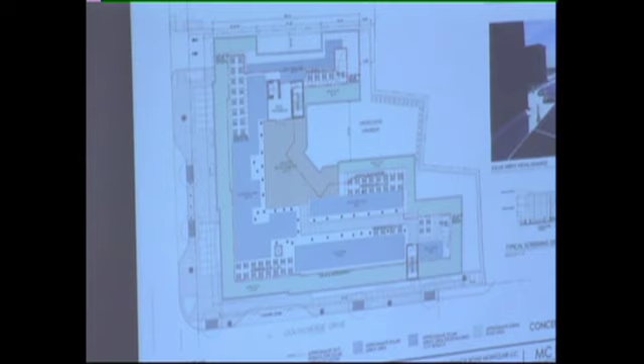So now we've come to 25% of the roof, which we feel is the maximum we could install as low on the roof as possible. So now, how do we go about determining the numbers for the solar power? 4,417 square feet is our working number.

We work with a solar consultant who recommends using about 30 to 35 square feet per panel. The reason for that range is you can't put the panels too close together, or one panel could shade the next. You can see in the photograph the panels are always slightly spaced. We also need room for serviceability, and there's the configuration of how things work out.

So we take the roof and divide that area, giving us an estimate of 145 solar panels on this roof. That's about 30 square feet per panel, on the more aggressive side of that range. The panel we're proposing is a 325 watt maximum power generation panel.

So now we've got the math to run the formula to determine what these solar panels will generate. Using the National Renewable Energy Laboratory website, which is run by the government, you input your solar panel and your zip code, and it runs a formula determining the number of sunny days versus days of rain and clouds, telling you how much energy you can generate from those panels.

At the end of the day, using those formulas, we get 49,665 kilowatt hours. I know we're not here for math, but this leads into the fact that we still only have 25% of the roof as solar. So to make up that deficit, we're proposing to purchase renewable energy credits, not for the entire 50%, but just the equal amount to what we can produce on site.

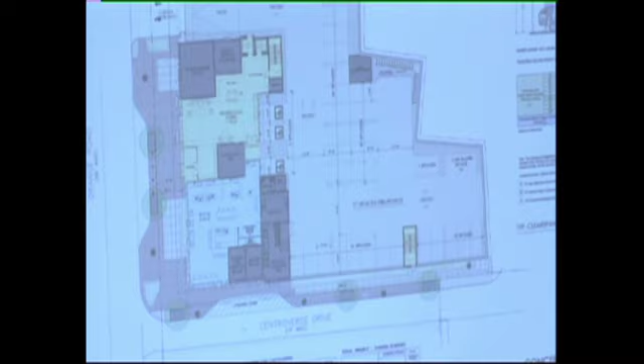And again, there would only be one move-in occurring at any given time, typically on Saturdays, and it's a scheduled service with building management. Mr. Johnson, my understanding is that assuming maybe a turnover of 30% or less a year, we'd be talking about maybe 12 moves a year. Is that your understanding? Yeah, for a building of this size, that's correct. For 46 residential apartment units and a turnover of approximately 30%, maybe there are 12 move-ins occurring in one given year.

It's a nice plan, but what's going to stop people from pulling in that curb cut out on Orange Road? That happens to be a whole lot closer to that door.

Again, building management is going to control that operation, right? How are they going to control it? So move-ins are a scheduled service. You have to apply through the leasing and management office to move into the building, to gain access to the building, to unlock the elevator and provide access. Building management has eyes, there are security cameras on the building. If a resident tries to move into the building on an unscheduled or uncoordinated day, I think they would be shut down.

So building management is going to go out, check the location of the van, the moving truck, make sure it's in the proper spot. That's what you're saying? I think the more important part of that is the access control on the back door of the elevator.

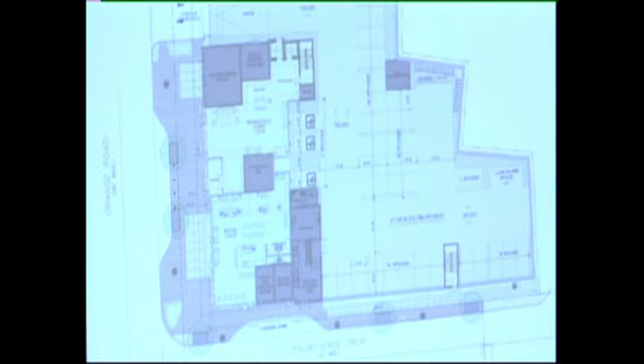And contractors or landscapers, would they use that loading zone? They would utilize the loading zone. And the building management would control that, right? So if someone was coming to service the live roof, they would use the loading zone or park internally in the garage.

Is there a concierge desk in the front? There's not a concierge desk here. There would be off-site management located in town or the surrounding area, but the building would be monitored 24/7. But I think what I'm alluding to is the concerns my colleagues have expressed about truck usage blocking the streets, without a doorman or door person.

Yeah, I'm saying another witness. But Mr. Johnson, will there be a valet there at all times? There will be a valet attendant internal to the parking garage, yes. Is that 24 hours, valet? That testimony will be provided later. We'll get to that a little further - we'll defer on that answer, as it's not correct in terms of the valet.

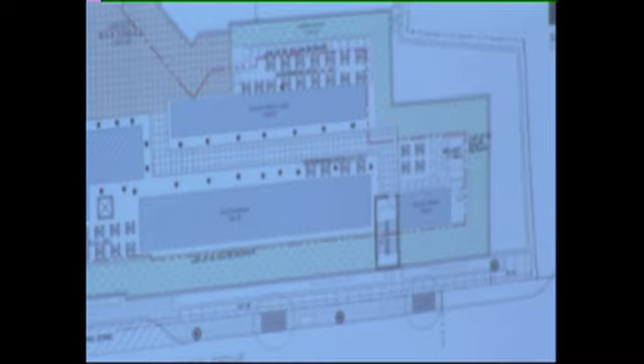I just have a question about the amenity court on the right there, the lower amenity place. Is that some kind of greenery that goes around the edge? It is - that's illustrative, but it's intended to be a raised planter at the edge of the parapet to soften the edge of the raised pedestal courtyard area relative to the adjacent parapet. It also keeps residents back from that edge and acts as a buffer.

How far is that from the next building, the edge of that? There's not much space between that and Valley and Bloom behind it. The line here that zigzags and is partially dashed represents the property line, the lot line - it's an atypical line there. Our ground floor level more or less follows that property line. We have a party wall condition offset from the property line by approximately 18 inches to provide for construction tolerance, but it's a typical downtown infill condition where the ground floor is built up to the adjacent wall of the adjacent structure, which doesn't have any windows either and is also a party wall condition.

And then at the upper levels of the residential, as I previously testified, the residential building where we have windows and apartment units for residents steps back from that property line to provide light and air.

Where is the typical screening detail at the roof, and where will that be installed? We have a typical screening detail located here, but that detail would be installed accordingly.

Right now we are schematically showing two RTU units, rooftop units used to heat and cool the common corridors, residential amenity, and residential lobby for the building. Those are larger units approximately 96 inches in height. They typically sit on top of a curb that's 18 to 24 inches high, and the actual unit can be 5 to 6 feet in height. So we would use that screening detail around that unit.

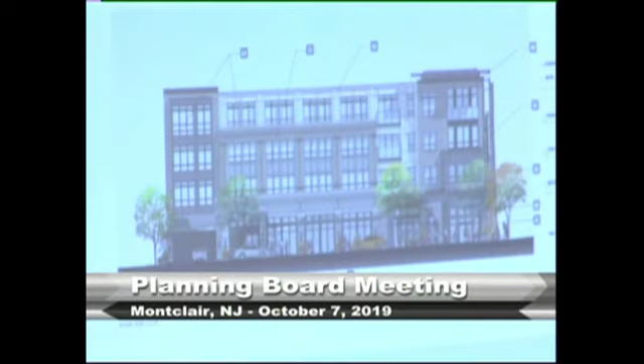That's not my reading when I look at that drawing. The roof datum line represents the top of structure at the roof, and then we're showing that the revised parapet at the corner of the building is approximately 48 inches in height. And the 3 feet below that—am I wrong? Okay.

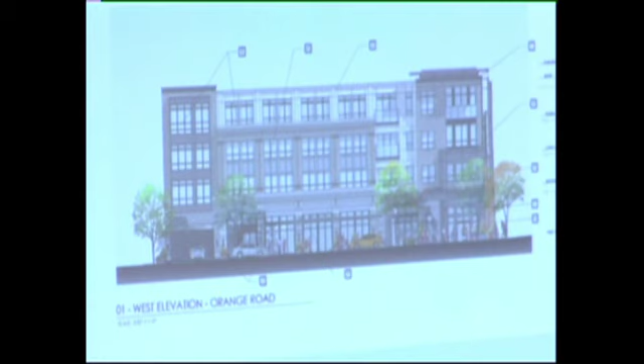I believe you. And did the building height change from 52 to 51? So the building height label was revised from 52 to 51. So 51 is the correct height that matches what's on the civil engineering drawing. And again, building height is being measured from the mean natural elevation around the building to the height of the roof deck. We're permitted 55 feet in this zone per the redevelopment plan.

Is there an image of the building in context to the surrounding buildings? There's not a revised exhibit that shows it in context. We have the previous exhibit that we proposed, that we presented at the September 9th hearing, that I could share with you. At some point, can you represent that again?

Revision. Sure, would the board like to see that now, or are you suggesting that we resubmit that as a revision? Resubmit it as a revision. Yeah, we'll resubmit it as a revision. Okay.

Just so you don't overlook it, we were talking about the rooftop - you didn't know what the height of certain things from the roof have to be. So I provided testimony that the rooftop equipment will be approximately 96 inches in height for the RTU units.

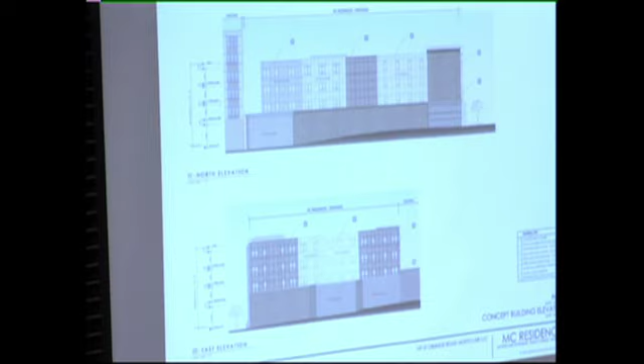Again, for the rear-facing elevations, building materials being proposed are vertical fiber cement siding panels with reveal trim at the upper residential floors, masonry brick veneer, and manufactured cast stone at the lower levels. Along the Orange Road facade—hold on, so you've decided to stay with the fiber cement panels?

If I can get there in my testimony—we heard comments from the board and took an opportunity to reflect upon the proposed exterior building materials. We had some concern; there was a recommendation to use stucco in place of fiber cement, and we had some concern with providing that.

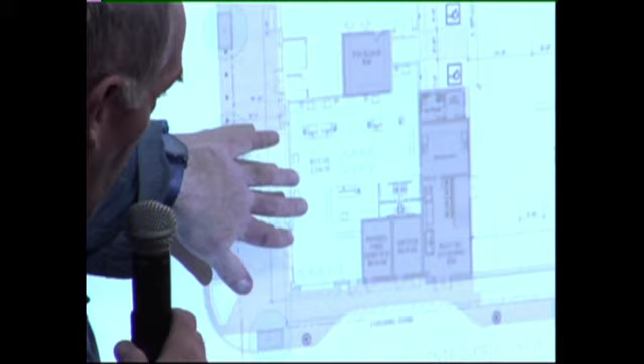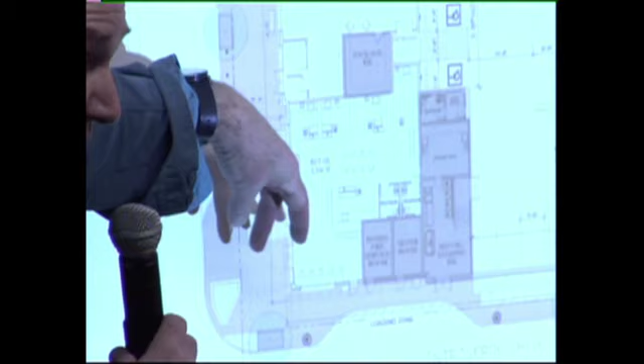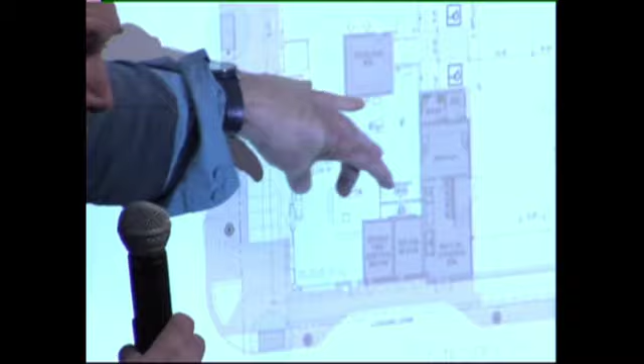So this material here, let me just call it cement—you have a patio within a plaza. This, I understand from testimony, is to be the outdoor seating, cafe eating area, tables and chairs. According to the sidewalk cafe license, because this distance between the facade of the building and the property line is more than 15 feet, this dining area has to be moved out so you can have a 6-foot passageway between the facade of the building and where people are eating. Where it's less than 15 feet, you can do the passageway between the curb and the dining area.

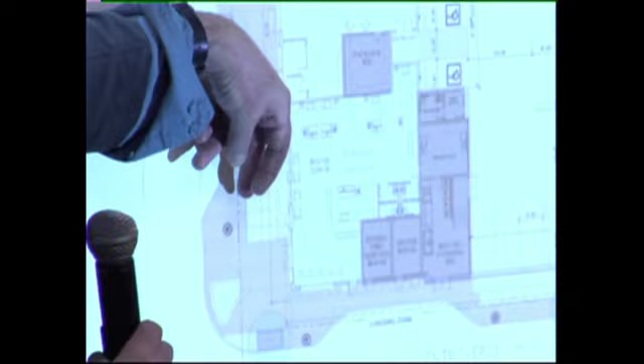We obviously intend to comply with the ordinance, and to the extent that there's an illustrative coloration that doesn't reflect accurate compliance with the ordinance, we intend to comply with the ordinance. So there'll be a 6-foot passageway.

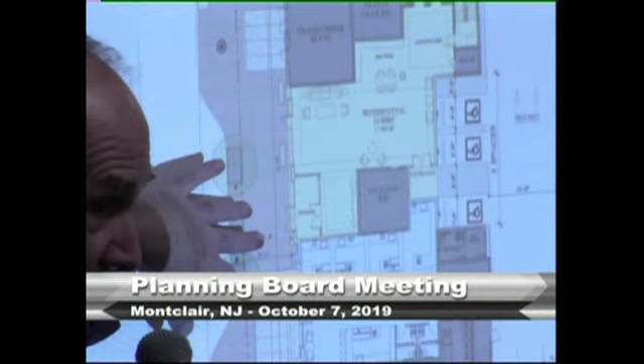Okay, second question: testimony was that this drop-off, pickup, Uber, Amazon area—is this private, for the building's use, or is this public? Is this for our use, or the general public? I thought it was general public.

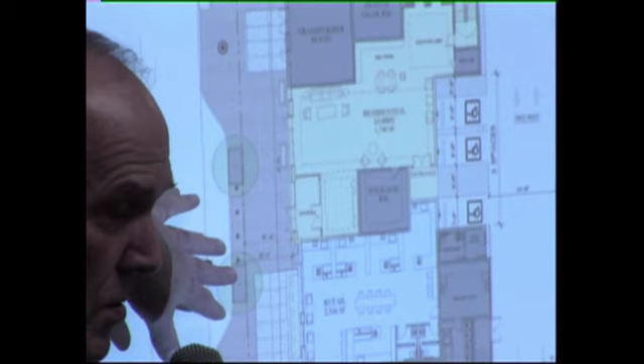It is for the general public. That's intended for public use, either Uber or residents who might be dropping someone off there. So that area is not striped as a loading zone or fire zone. It is open to the public.

So I can just park there for as long as I want? You can't. Previous testimony was provided, and there will be separate testimony by the owner or applicant regarding how management practice will occur for this building and how that will be monitored. I thought the intent was short-term. Now I'm confused again. So the management is going to manage the public property?

I think, look, it's a public right-of-way, so obviously a guest or resident of the MC residences could have an Uber drop them off there, as well as somebody who just says to the Uber driver, let me off here, whether or not they're intending to access the building. I don't know about the hypothetical you're proposing, which is could somebody use it as a parking space? I don't think that's a viable parking space, which is a township right-of-way enforcement issue. Certainly, we're not suggesting that we're going to be enforcing the township right-of-way.

So you're not asking for an easement from the town for that space? No, I don't believe so. The application, there's nothing in the application about an easement for that town space? No, for private use. No.

Okay, and just so we're clear, Orange Road allows parking along its entire length currently, in front of your site. It's public parking now. We'll obviously look at that. I don't know that Mr. Johnson's actually the correct witness. No, you raised it, I was addressing you. I should clarify, I'm speaking more hypothetically than I am with certainty of testimony.

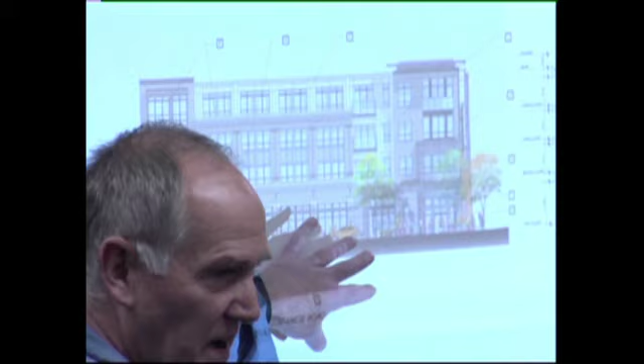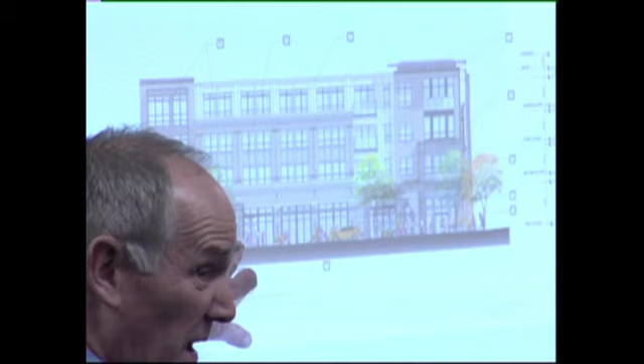Okay, and then could you put up the Orange Road facade? Yeah, this works. So my question is, according to the diagram, there's some kind of utility space, and then there's space for the lobby, for the tenants, and then there's retail. Could you tell me which parts of this are utility space, which of these bays, or how many of these bays is utility space, and whether they use spandrel glass or some other translucent or non-translucent material?

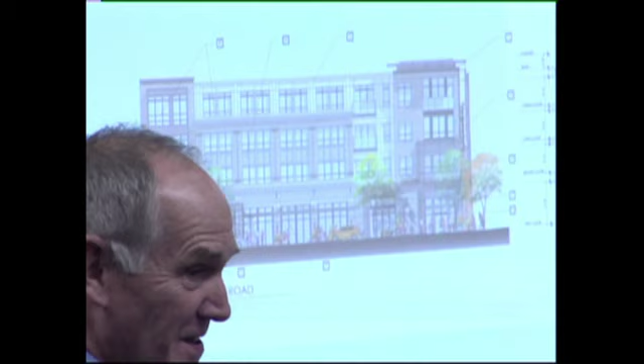The first bay here is a transformer vault room located internal to the building. There's also an electrical switchgear room there, so that's mechanical space internal to the building. There would be a combination of mechanical louvers there, and some opaque glass used for the access doors to that mechanical space so that it mimicked the adjacent storefront glazing proposed on the exterior facade. And it's just for that one bay? Correct. Okay, thank you.

Mr. Johnson, are you saying there's going to be louvers on the Orange Road facade? There would be some ventilation louvers for that mechanical space, yes. But the design of those louvers would be designed and built into the storefront frame, mimicking the design of the adjacent storefront windows. So are those louvers shown on this elevation? They are, those louvers are shown here in elevation, and those were submitted on the previous elevations, building elevations provided to the township and the board members. That has not changed.

So just to clarify Mr. Rebecki's question, the glass is considered a primary material, yeah? So therefore you'd have at least 5 primary materials, if not 6, in your drawings thus far? So again, glass is a primary material, but I would think that the interpretation here is that windows are a permitted material. I don't know, since Mr. Schwartz brought that up, I just wanted to make sure we're all on board with how many primary materials there are.